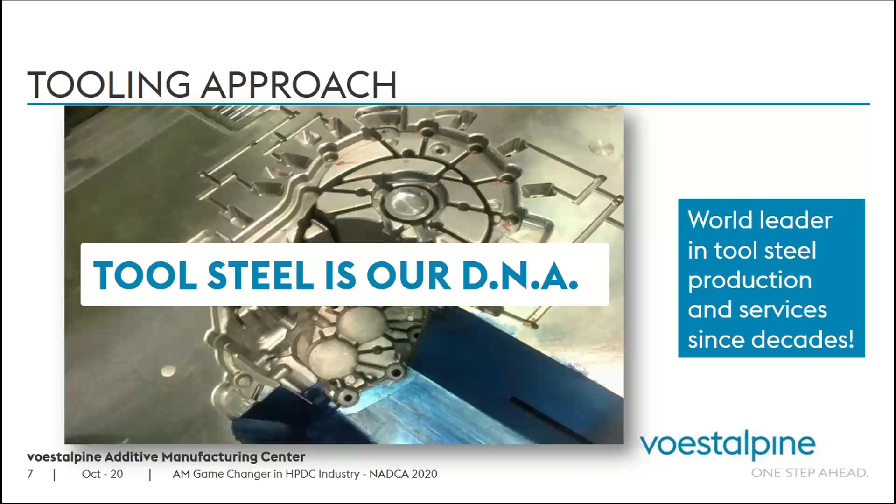I'd like to start with this slide, which is a tooling approach for the voestalpine Group. voestalpine is a world leader in tool steel production and services for decades. Tool steel is actually in our DNA. This is something we have been doing for decades, and this is part of who we are and how we differentiate ourselves in the market.

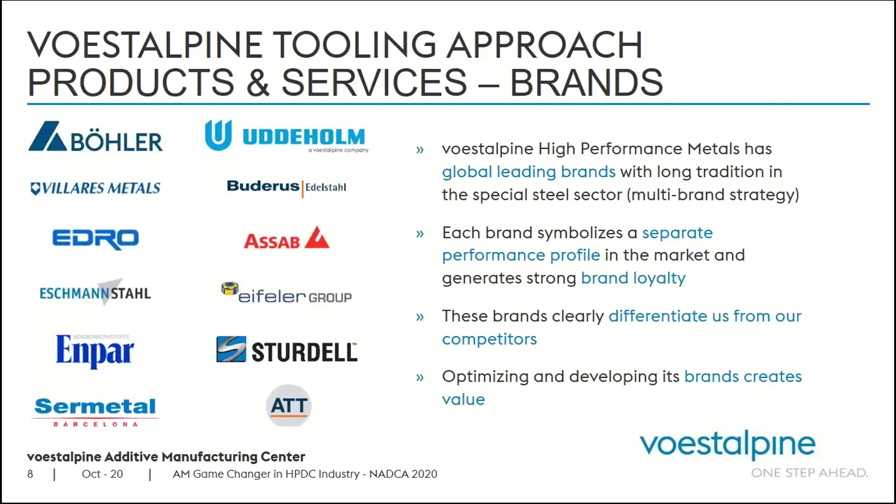So this is a very high level introduction to our group. And if you look at the value added service to our customers, besides the production mills that I presented,

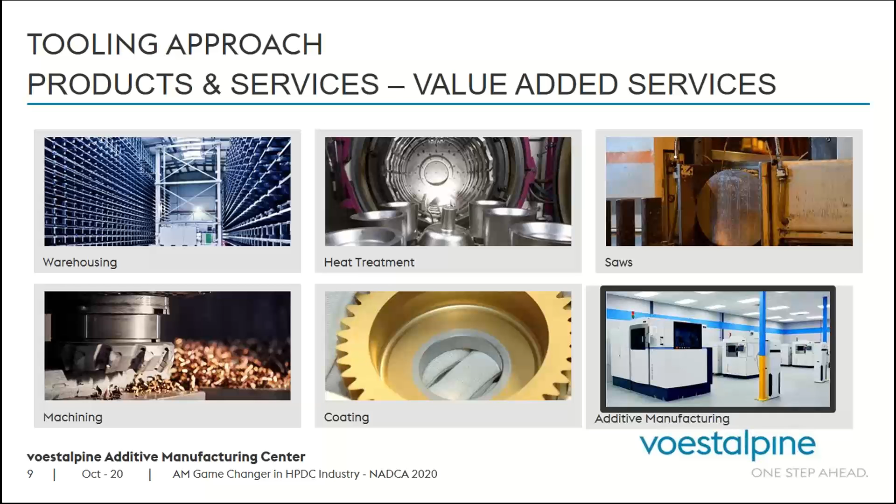we have warehousing in multiple locations, having material ready for our customer. We provide heat treatment, saw cutting as needed, machining as required, like 6-side machining or additional machining if required, coating, the new addition from Eifeler, and last but not least, we added our additive manufacturing capabilities to complement the whole

value added service to our customers. So when you look at the tooling approach, as I mentioned, we discovered that additive manufacturing is the missing link to a full solution provider. And that's why we embarked on this journey of additive manufacturing with our expertise in powder development and powder production and all the engineering support that we have and the post-processing. So AM was a key to be added to our portfolio.

So switch gears now to focus on additive manufacturing, which is the main focus of this webinar. I would like to start with a video, just a couple of minutes. This is from our group, voestalpine, and it shows a focus on one specific technology, powder bed fusion, which is mainly what all the applications I'm going to present in the case studies have used, because with additive manufacturing there are multiple technologies like direct energy deposition, wire arc additive manufacturing, but powder bed fusion is very applicable for die casting because it can provide lots of internal features. So let's watch together this video and then we'll continue our discussion for the webinar.

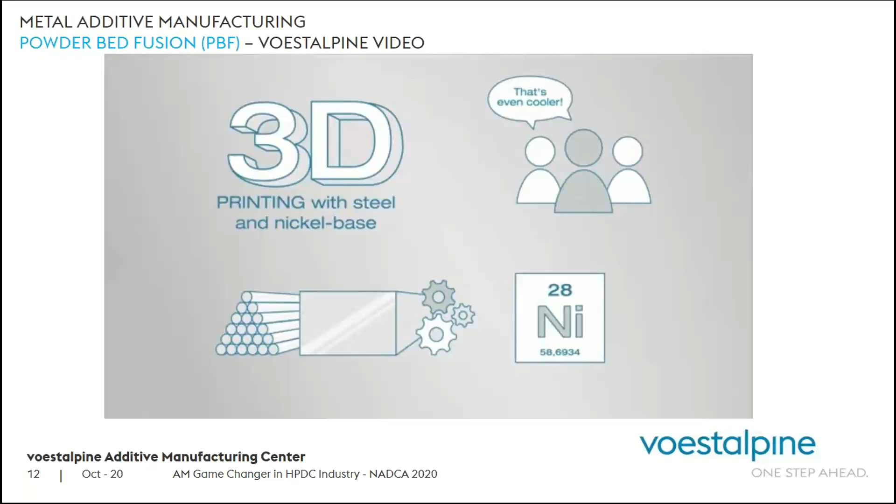You've heard of 3D printing, right? Nowadays we can print lots of different things out of plastic, including toys, fancy sculptures, our own little mini-me. But what about 3D printing using steel, nickel-based alloy, and other metals? Believe it or not, that's possible too. Whether you need parts for an aerospace turbine, a racing car, a medical implant, or a tool, you can print them all using what those in the know call additive manufacturing. By covering the whole value chain from the powder to the finished product, we at voestalpine will be the leading metal powder supplier for additive manufacturing and customized 3D manufactured parts.

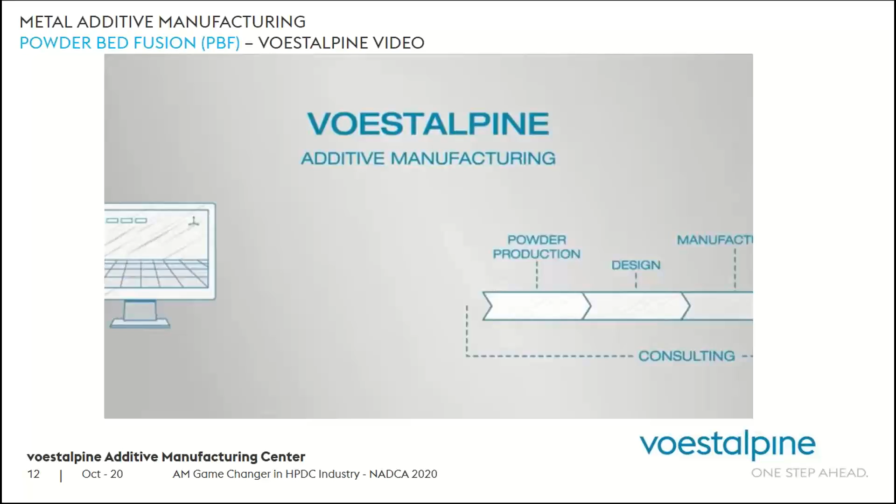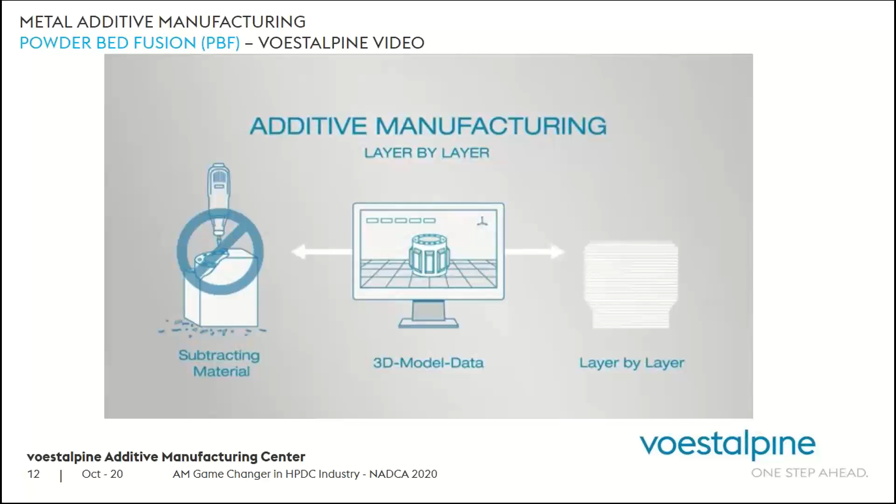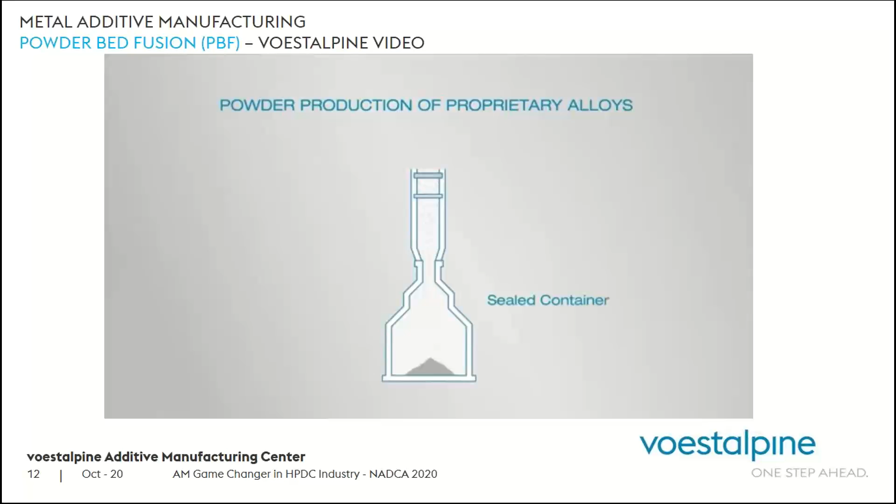Let's take a look at how it works. Objects created using additive manufacturing are built up in layers according to 3D model data. Instead of cutting material away, it is added layer by layer to form almost any shape you need. For this metal processing, we produce high-quality metal powder within our group at Böhler and Uddeholm. This is typically done by vacuum induction melting and inert gas atomization. The powder can be made from metals such as steel, nickel-based alloy, and cobalt chrome. First of all, the melted metal alloys are refined and degassed. This refined melt is then poured into a gas nozzle, where it is disintegrated into metal powder by a high-pressure gas stream. The different powder fractions are then put through a sieve to separate them before they are sealed in containers. Then we can start creating.

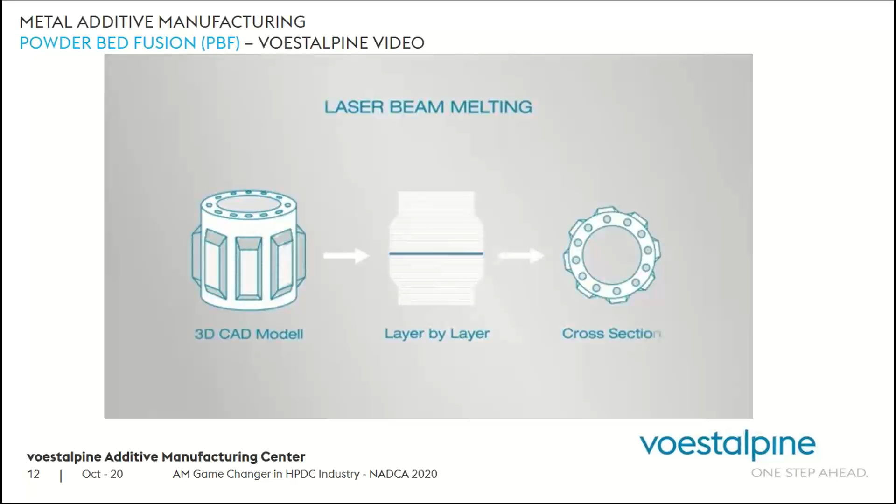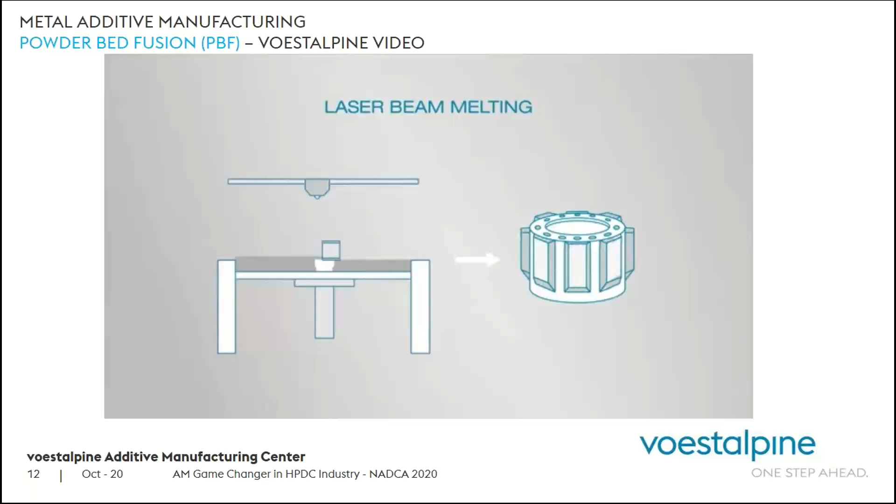At voestalpine, we use the so-called laser beam melting process. The first step is to slice a 3D CAD model of the designed component into cross-sections. This data is transferred to the additive manufacturing system, where a laser melts each section in 20 to 100 micron layers of metal powder from the bottom up until the part or prototype with full density is built. Additive manufacturing opens the door to a world of new possibilities in the production of tools and parts. Thanks to this

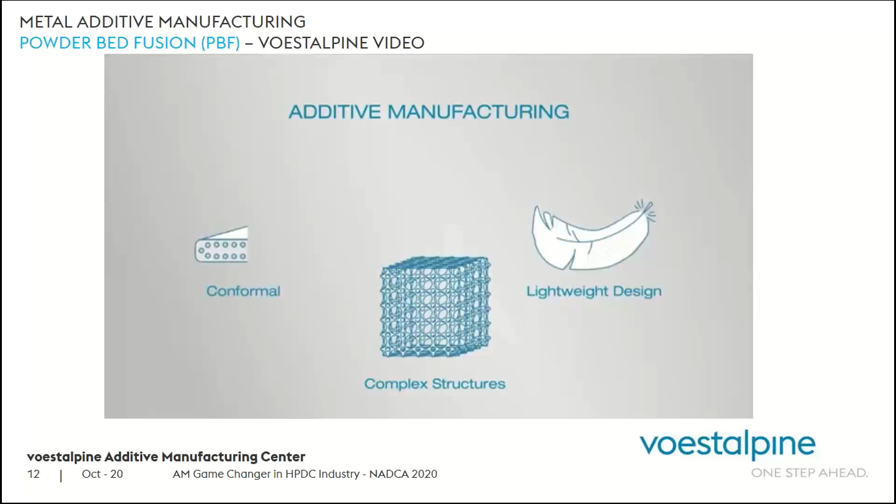state-of-the-art technique, we can now create custom-made parts with complex structures. We can make lightweight designs as well as improve conformal cooling by optimizing formerly inaccessible areas. And the economic advantages are numerous. Faster production, shorter development cycles, lower transport and storage costs, reduced raw material consumption, and the list goes on. Inspirational, isn't it? For more information, please contact us or visit our website at voestalpine.com/additive manufacturing. voestalpine, one step ahead.

So hopefully the last couple of minutes was able to get everybody grounded about the technology and how it works. So this slide that you see, several years ago when you start talking about additive manufacturing, people were concerned about the density that you can get out of building the part by powder.

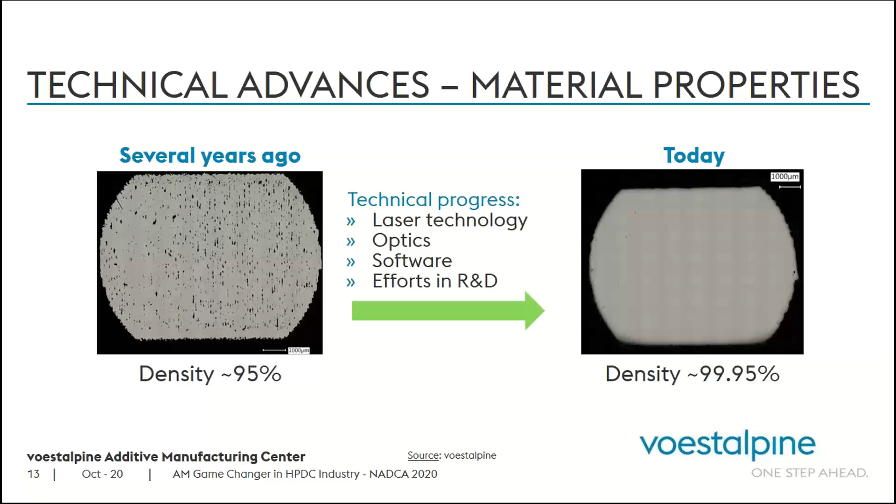So it was around 95%, but over the years, with technical progress in laser technology, optics, software, and efforts in R&D, today you can get the density to 99.95, and if you need additional for any applications that would require maybe fatigue strength, you can just go for hipping as well, and you get it to 99.99. So this is to increase the confidence in the material integrity you get for AM is the same identical like the wrought steel. And this slide actually confirmed the same message. So this was from a voestalpine powder.

If you look at this table on the right-hand side, if you buy wrought steel for DIN 1.2709, its hardness is up to 52 Rockwell, tensile is 2000, yield is 1930, and elongation is 8. If you build it by additive manufacturing, as printed, you get certain hardness and mechanical properties. Going through the recommended heat treatment cycle for this powder, you can get it to 55 Rockwell, almost identical to wrought steel.

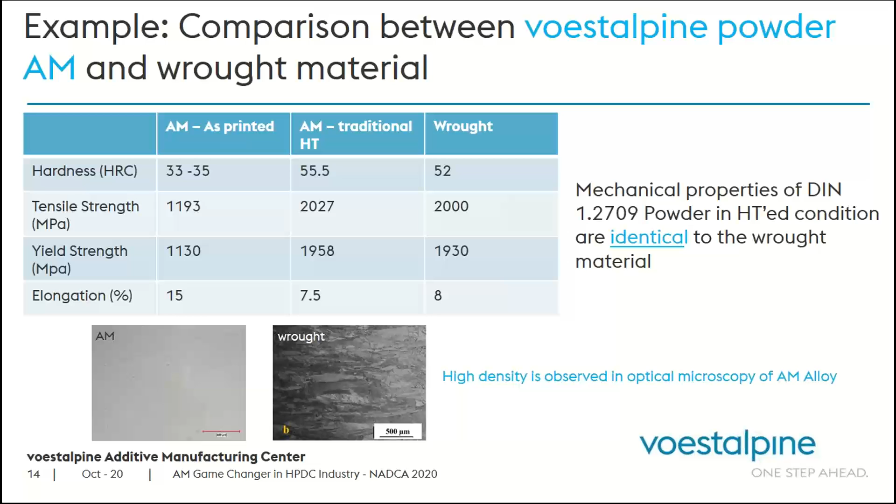Below are two pictures from microscopy showing the density observed. It is very high density for the AM part on the left-hand side compared to the wrought steel. These two slides confirm there is no risk in building high-pressure die casting inserts by additive manufacturing. The main message here is don't try to use additive manufacturing for parts dedicated to other manufacturing technologies.

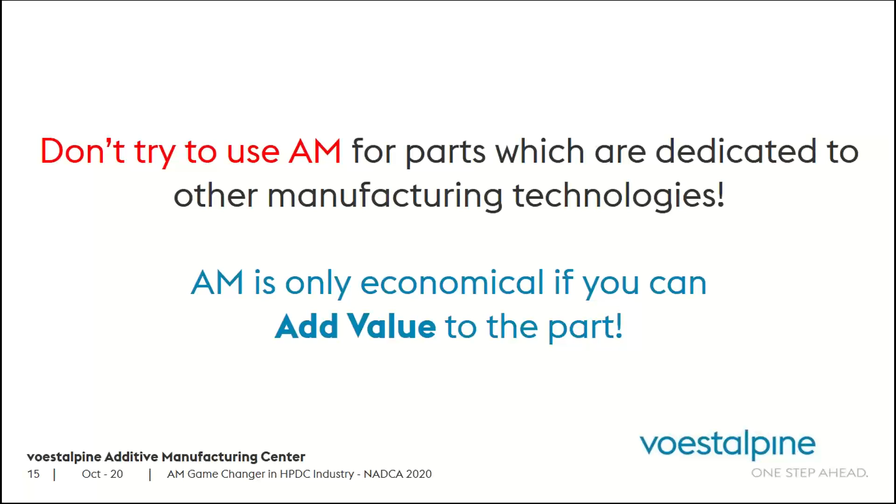Additive manufacturing is only economical if you can add value to the part, and adding value could involve different aspects of the product. The whole idea is you have to design the part specifically for additive manufacturing, and then you can get all the benefits that AM can provide in your industry.

I'm going to switch to some case studies and success stories. Looking at high pressure die casting, what are the common failures? One is soldering, when aluminum or molten metal sticks to the die. Another is heat checking, a combination of thermal cyclic stress, tensile stress, and plastic stress. Another is shrinkage porosity, which occurs during solidification and hot spots in the porosity zone. Another common failure is mold erosion, which is mechanical wear mainly due to the velocity of the melt. These are common failures happening with traditionally built molds.

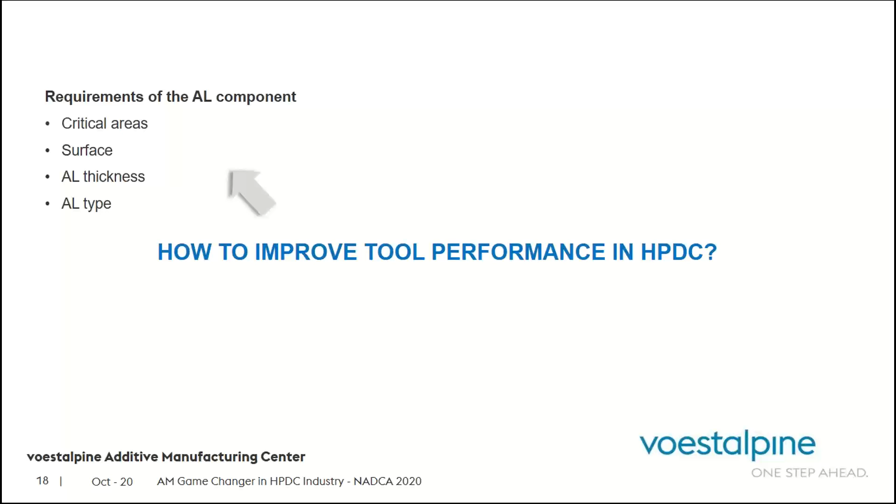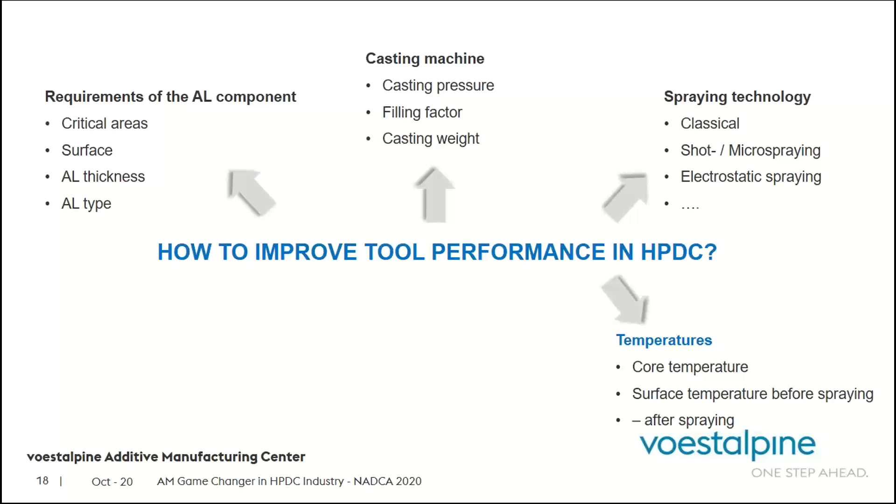So how do we improve tool performance in high pressure die casting? There are multiple aspects to work on. One is the aluminum requirement of the component. Another is the casting machine itself, including casting pressure, filling factor, and casting weight. Another is the spraying technology, micro spraying or classical. Also the temperature, core and surface temperature before and after spraying, the planned cycle time, contact time, casting simulation, and casting speed.

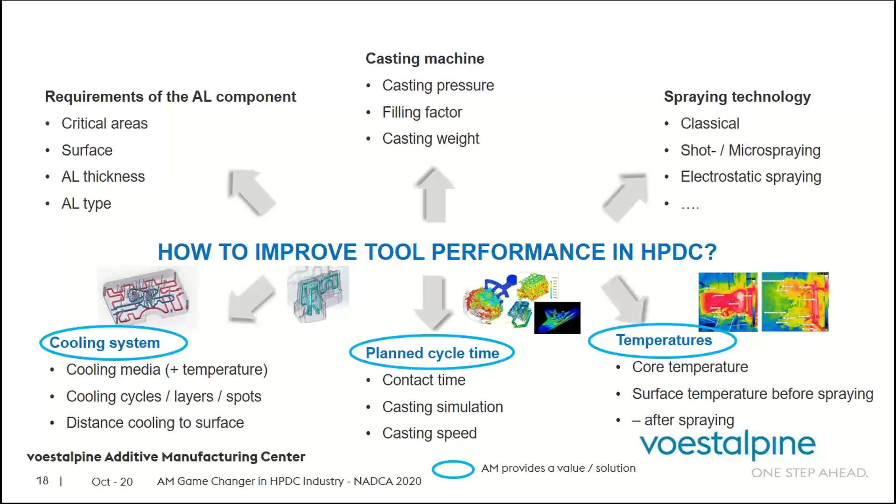Last but not least, the cooling system: the cooling media used, the cooling cycle, and distance of cooling to the surface. If you look at the bottom three categories, these are where additive manufacturing provides value or a solution in improving performance of high pressure die casting: controlling temperature, planned cycle time, and the cooling system as well.

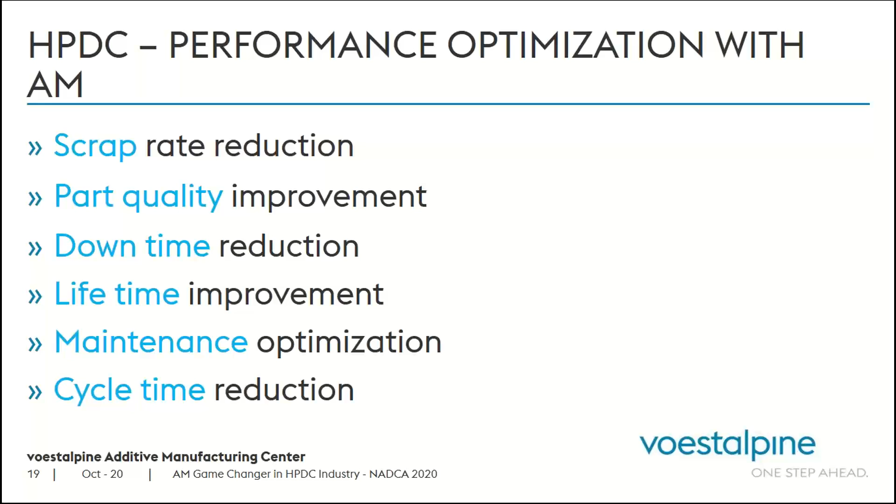For optimization of high pressure die casting by additive manufacturing, it adds value through reduction of scrap rate, which is commonly very costly for die casters. Part quality improvement is another value added by using additive manufacturing, along with downtime reduction, lifetime improvement, maintenance optimization, and cycle time reduction. Categories of parts that could be improved by additive manufacturing include heat attacked sliders, sub-inserts, and the distributor or ring.

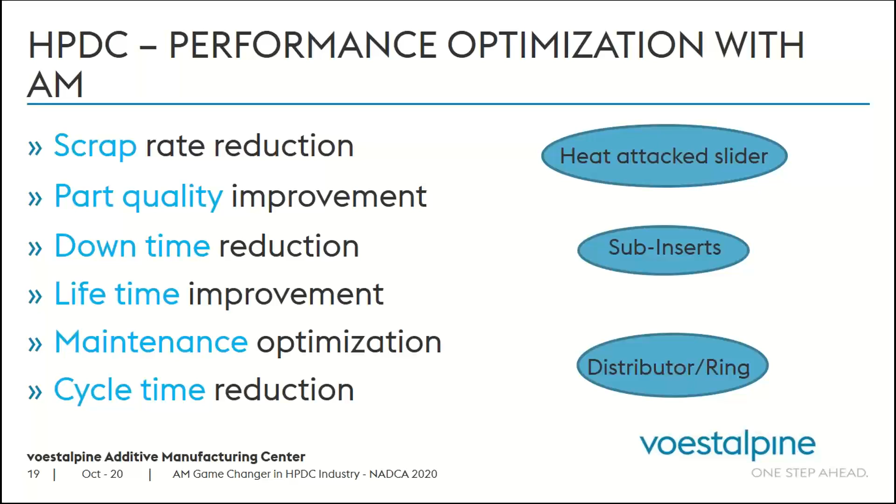These are some of the benefits you can reap by applying additive manufacturing correctly and redesigning inserts for AM. Don't just take the conventional design and build it by AM. The most benefit comes from having a design engineer and a simulation engineer working hand in hand to redesign the insert—minimizing scrap rate, increasing part quality, reducing downtime, improving lifetime, and optimizing maintenance and cycle time reduction.

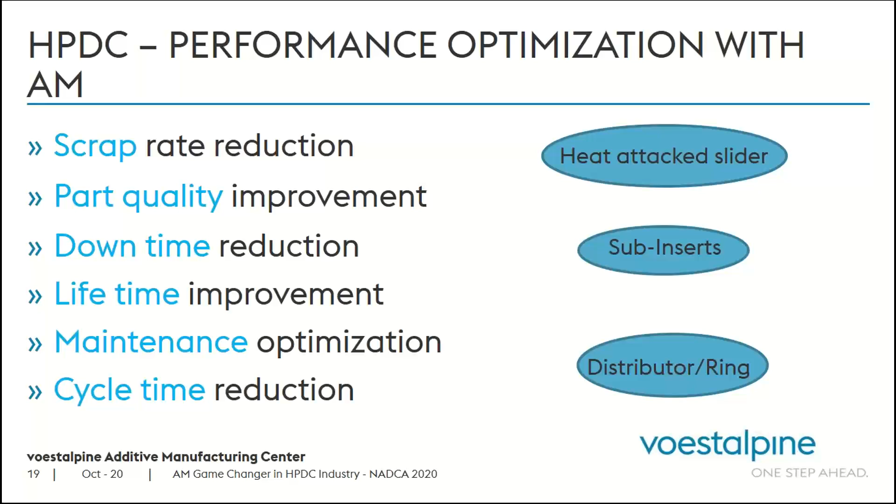I'll show you a couple of case studies from our group. For the distributor you see in front of us, we used powder from voestalpine, and the reason for applying additive manufacturing was targeting cycle time reduction and lifetime improvement. As you can see, the internal cooling channels are quite complex. After 120,000 shots of this specific application, we achieved a cycle time reduction of 2.5 seconds and a lifetime improvement of over 200%.

In this case, the original cycle time was 53 seconds and we were able to drop it to 50.5 seconds—2.5 seconds per shot saved on this distributor. From our group, we provided the powder, did the design, simulation, the building, and the heat treatment as well.

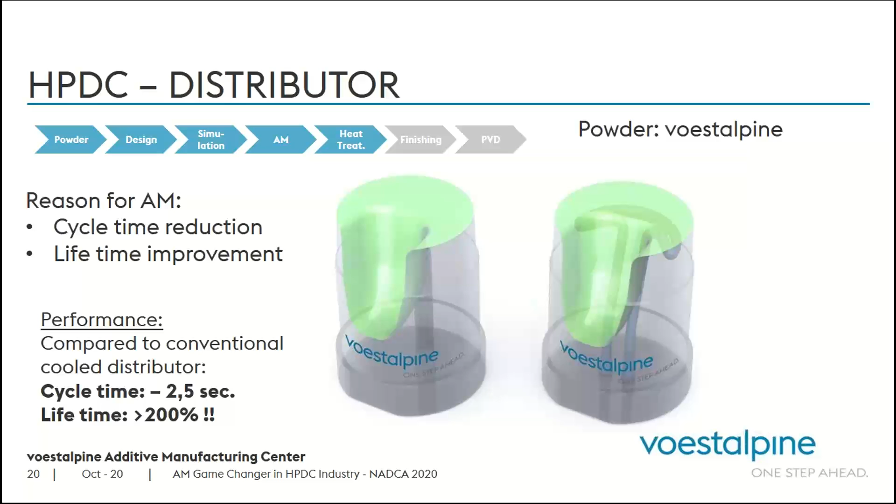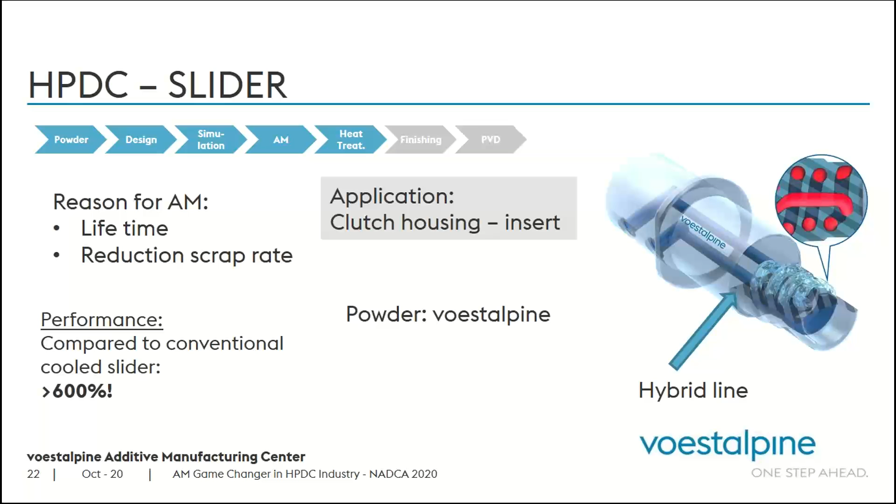600% improvement. So in this case, from 8,000 parts that you were able to get from conventional design, we are able to get 50,000 parts. That's an unbelievable improvement that you can get by additive manufacturing, from 8,000 parts to 50,000 parts - an unbelievable achievement redesigning the part inserts by additive manufacturing.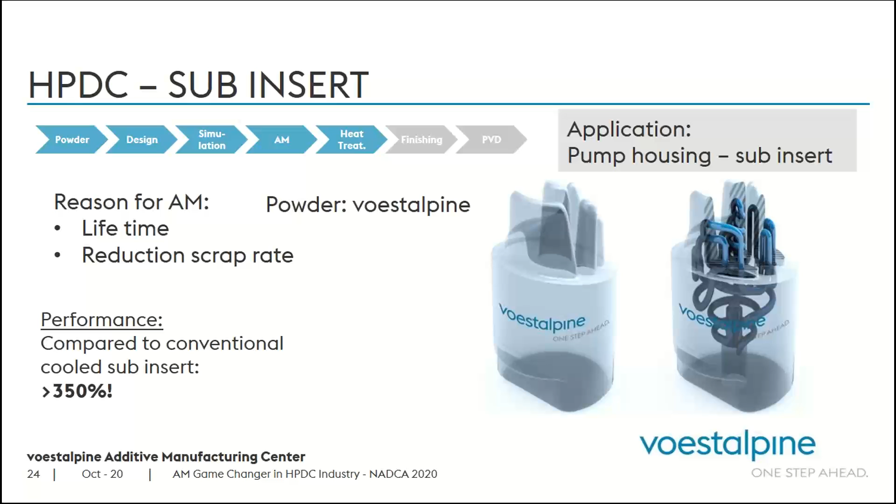Compared to a conventional cooled sub-insert, 350% improvement. So conventionally, they were able to get 7,000 parts. By applying additive manufacturing and the right design, getting the cooling where it's needed with no restriction - there's some guideline for the design, but you can say if you can design it, you can print it - from 7,000 parts, we were able by AM to get it to 25,000 parts. That's a really improvement in the lifetime of the insert.

Another example, as you can see here, this was for a major OEM car manufacturer, with extremely high temperature reduction. If you look at the soldering problem again here on the tip, it was over 370 degrees Celsius at the tip conventionally. This was for a differential housing. By applying additive manufacturing, the scrap rate was reduced from 20% to 6%, which is a huge, huge improvement in scrap rate reduction.

And we applied the hybrid build approach that I explained before to minimize the cost for the customers, so they increase their profitability as well. And this 370 degrees Celsius soldering problem, by additive manufacturing design, we're able to lower the temperature to 280 degrees Celsius with no soldering problem at all. So this is a huge, huge improvement.

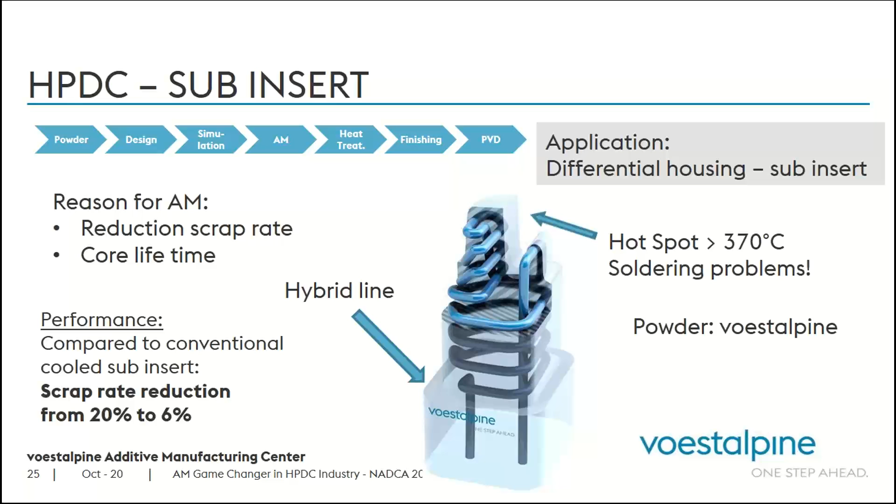This is just to show you that this is not just a prototyping technology, but now it could be in serial production. And it's working and has been proven with multiple customers to us. So this was just to highlight a couple of success stories and to increase your confidence that inserts are already running in actual production environments with huge success, huge acceptance for additive manufacturing in high pressure die casting.

I will switch gear right now about voestalpine and what we can offer to our customers, and what is our approach for additive manufacturing, adding value to our customer.

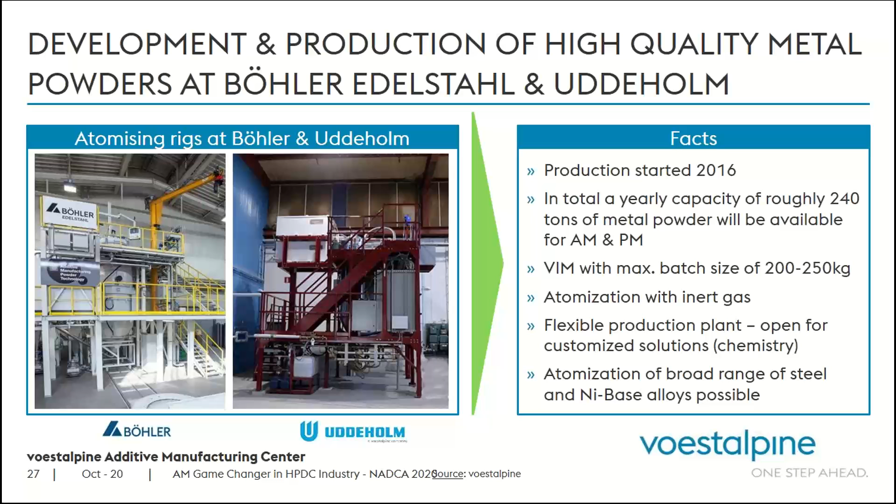The snapshots that you see on this slide show multiple mills where we can produce the powder used in additive manufacturing. We have capabilities of approximately 240 metric tons every year for multiple grades, for multiple mills that we produce powder, like Uddeholm.

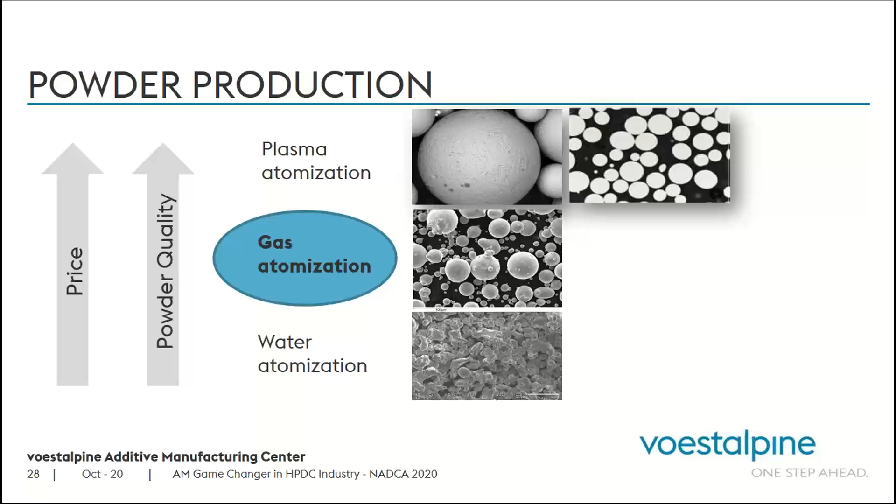What we are using for additive manufacturing, for the time being, and for high pressure die casting is the gas atomization process, which is very convenient and optimized for this type of application. Plasma has its own niche, like for aerospace and for specific grades like titanium. But gas atomization is the most common production method for powder, commonly accepted and used in this industry.

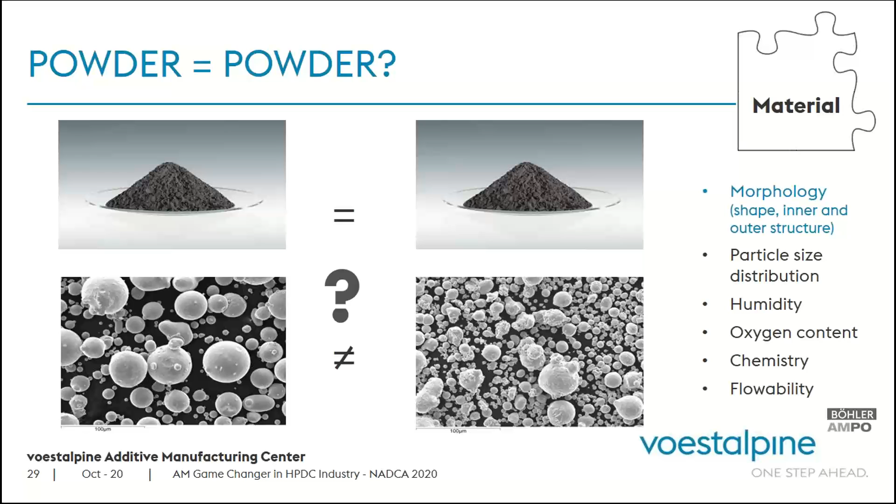If you look at the powder, anybody looking at two batches of powder would think they look the same. However, when you go deeper, it's completely different. There are lots of aspects that affect powder quality: the morphology, the shape, the inner and outer structure, particle size distribution, the humidity in the powder, oxygen content, chemistry, and flowability. That's why we put a lot of focus on the quality of the powder we are producing and delivering to our customers, or using within our additive manufacturing centers internally.

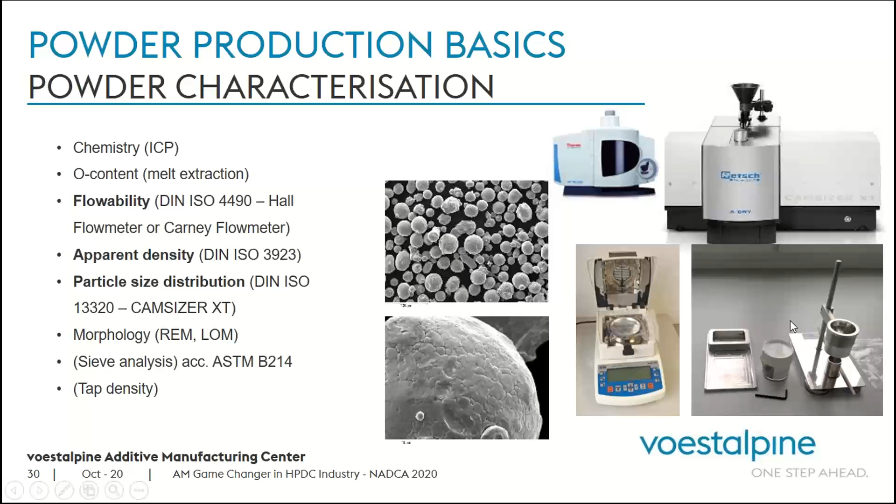So if you look at this, there's multiple testing that has to be done at the mill. Like you have the CAMSIZER, as you can see here on the top right, for particle size distribution and checking the flowability, and everything is done according to the standards.

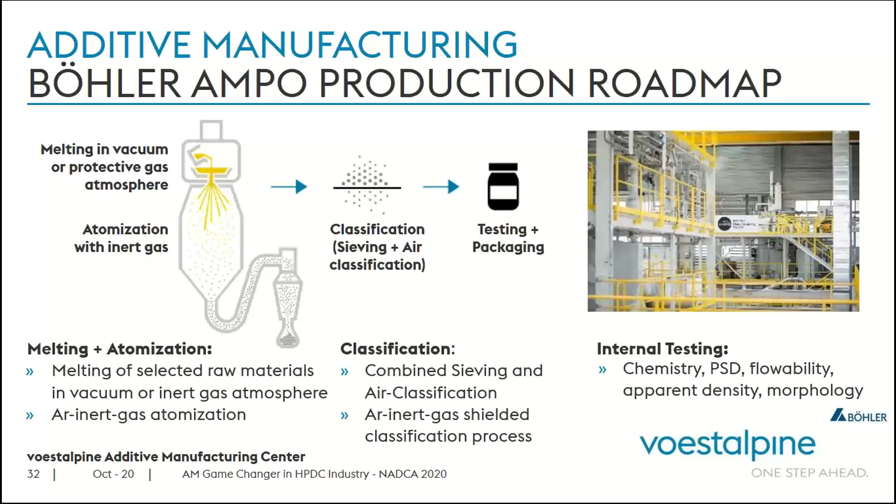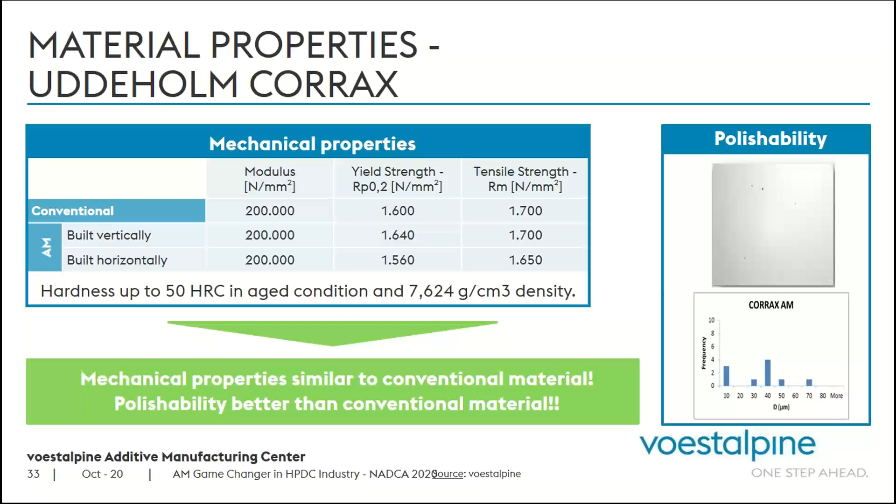And that's what we are doing in multiple industries as well, producing specific powder for specific applications. To give you an example, this is another grade that we are using for high pressure die casting. If you compare it to H11 or H13, there has been a project with OGI lab in Austria, with voestalpine, doing multiple testing. In this case, there were over 800 specimens tested.

As you can see here, it's being inserted in molten aluminum and then being cooled back and forth, repeatedly. And in summary, looking at the grades that have been produced, adding value, there's better performance on the heat checking resistance compared to the traditional H11 and H13. This was done by additive manufacturing.

We are literally trying to have breakthrough technologies and specific powders that add value to our customers. If you look at the right-hand side, going through the same thermal cycling, the cracking is just completely improved. As you know, heat checking resistance is the resistance to the combination of thermal cyclic stress, tensile stress, and plastic stress. So if this was the standard performance, the red line, it went far beyond, which is much better.

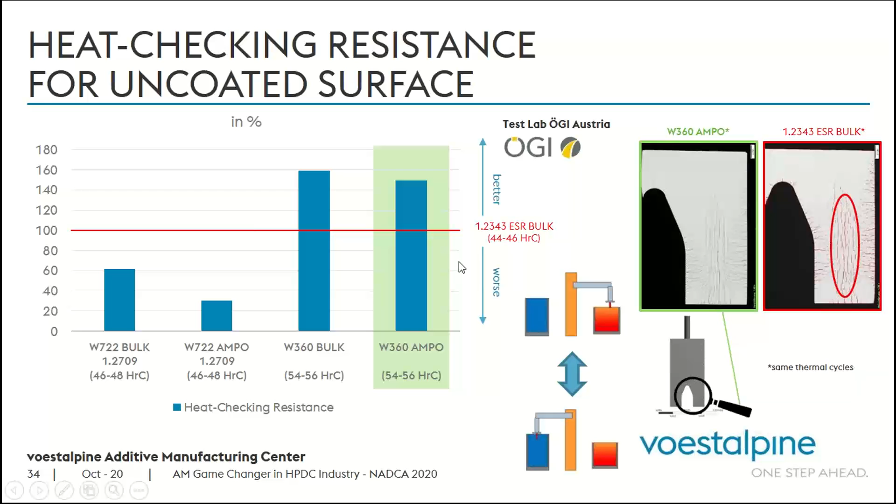So the message regarding the powder: we have the standard voestalpine material, which has its niche application, and you have been using it for quite some time, very successful, well accepted in the market, providing value for our customers - like for not bearing mechanical load, low velocity region, room for conformal cooling, or low tool temp at end of dwell. At the same time, we have a premium material solving specific problems that you're not able to get with traditional material. For example, significant mechanical load, or a thin weight saver where there's no room to add conformal cooling, or a high velocity region.

And what falls in between, we have a very strong engineering team that needs to determine what is the right material to use by going through simulation and identifying what is the potential, what is the value. We need information from our customer on the casting process and the insert geometry to decide. But what I'm trying to send as a message here: we can get it all. Whatever the type of powder needed, we can provide it, along with the design and the value to our customer.

So this is the message here: you should get the cooling where you need it, not where you can drill it, not restricted by the design or where you can drill and plug it. As an example, on the left-hand side insert here, you cannot just keep drilling because of this notch. However, with conformal cooling, you can go around it and get it to the tip. So this is the message of AM - that you can get the cooling where it's needed.

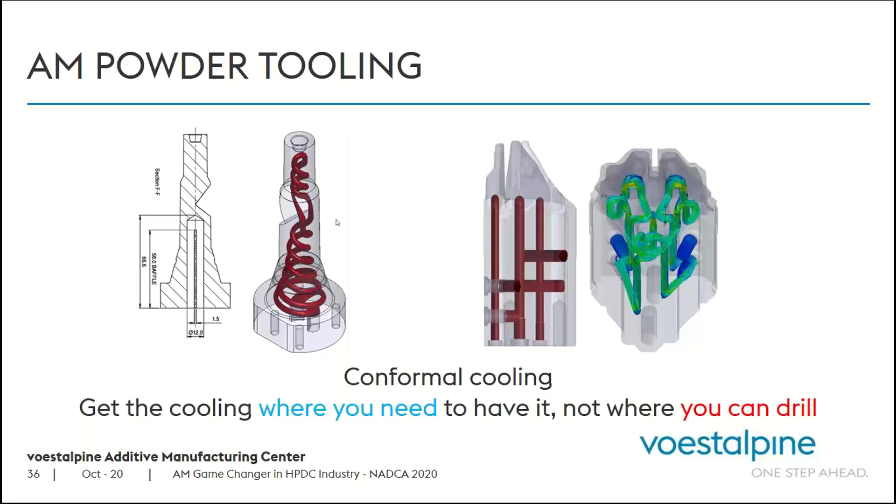So this is the hybrid approach that I explained before in a couple of the case studies. As I mentioned, the motivation of using it here is reduction of AM volume to the functional areas that really require it, and reduction of the manufacturing cost as well, which benefits our customer, trying to minimize the cost per insert.

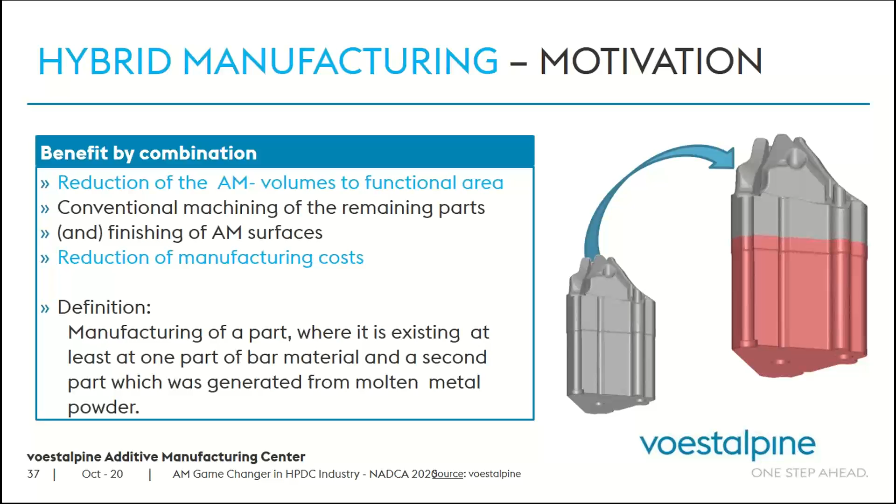Switching gears right now to give you a snapshot about our additive manufacturing global network and footprint. We have 2 locations where we produce the powder - Uddeholm in Sweden and Böhler in Austria. We have multiple additive manufacturing centers. The first one was in Düsseldorf, Germany. Now we have 2 locations in China, in Shanghai and Dongguan. We have 1 in Taiwan, 1 in Singapore, and in North America we have 1 in Toronto, Canada, and the other one in Houston, USA.

All these facilities are ISO certified, and the location in Toronto, Canada is AS 9100 certified, which is mainly for aerospace. So we are qualified to deliver inserts for aerospace, which we are currently doing.

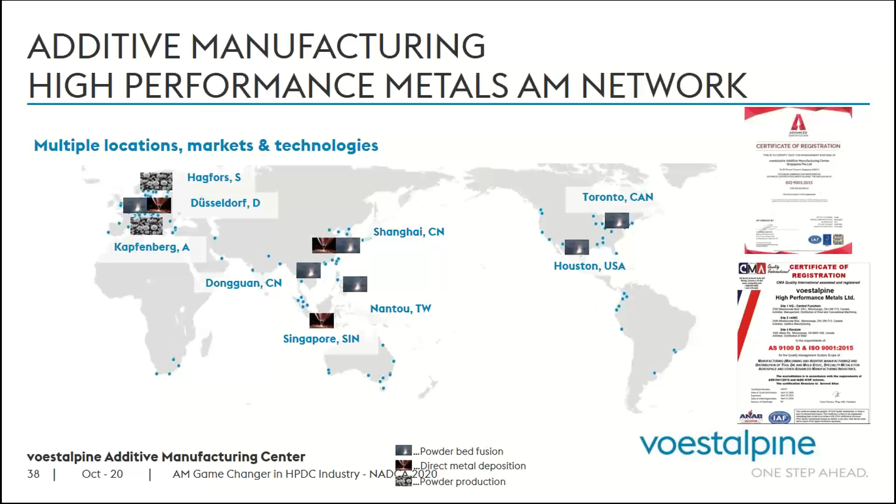The additive manufacturing technologies within our group are split into 3 major categories, and we keep adding new technologies every now and then. We have powder bed fusion, which we explained in the video, and a couple of the case studies have been built using this technology. Then we have direct metal deposition, which uses metal powder, and we have WAAM - wire arc additive manufacturing - within our group.

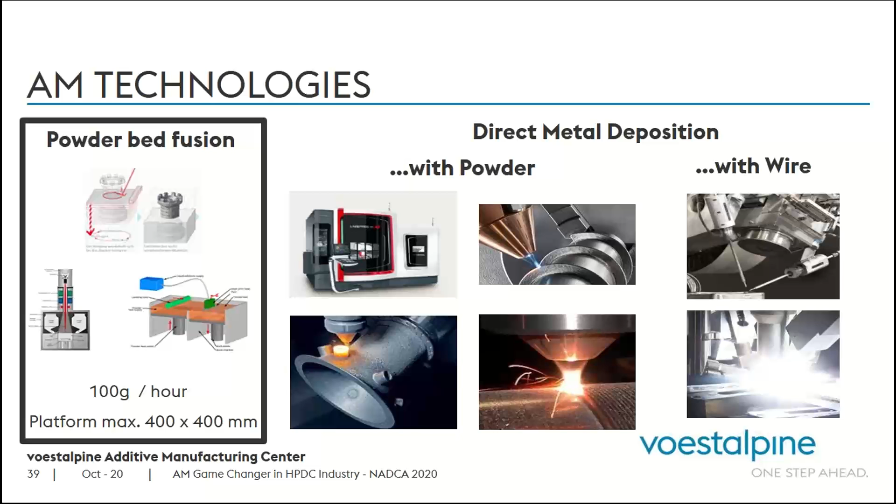Having multiple technologies, we are able to provide a solution, not restricted to one type of technology. These are snapshots of the machines that we have within our group, between laser beam melting and direct metal deposition, and multiple materials that we are producing within our group.

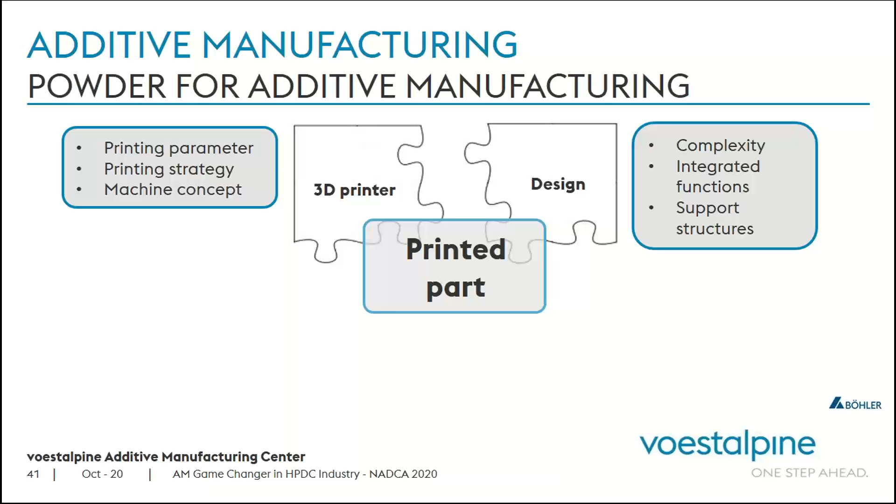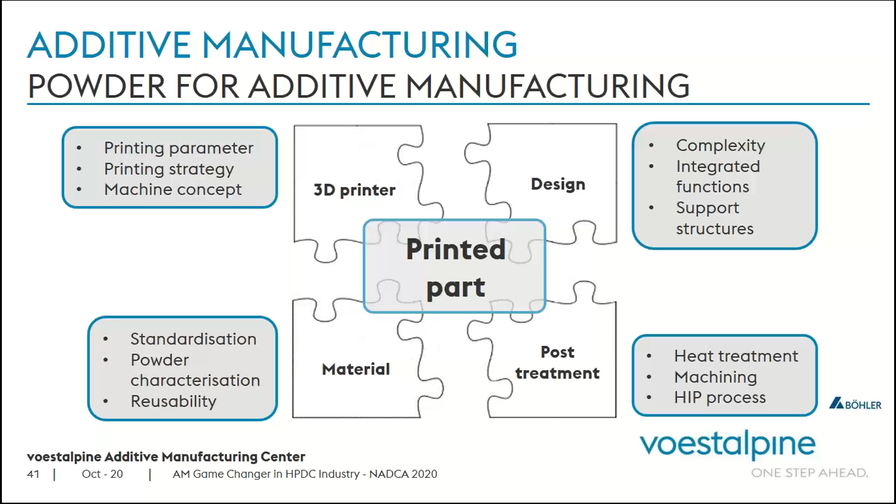So switching gears a little bit about the quality of the printed part - it's a combination of multiple things. It starts with the design. You have to design the part for additive manufacturing to get the best benefit out of it. Then you look at what type of technology for printing, what is the printing parameter, printing strategy, machine concept, and then what is the post-treatment, what type of heat treatment, and what type of post-processing is required. All this affects the quality of the part you are building by additive manufacturing. And last but not least, definitely the material you are using - the powder and the quality of the powder.

So for voestalpine, we are literally providing a solution along the whole value chain for powders and parts.

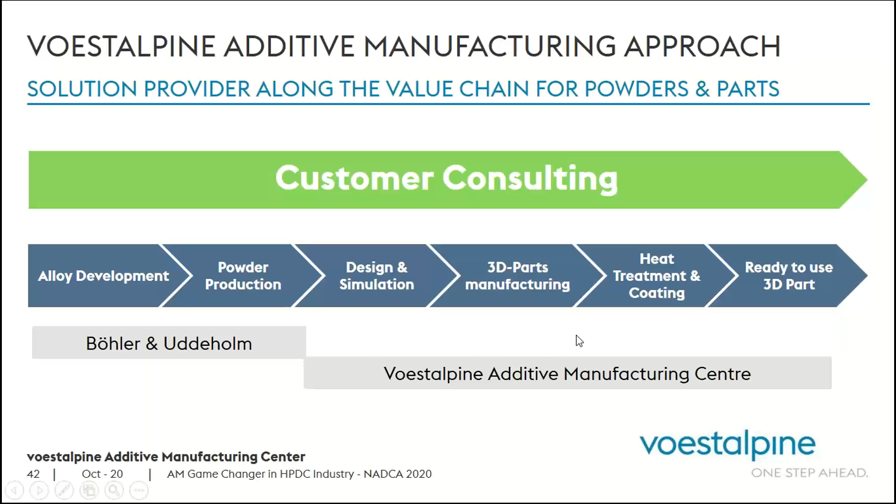So we have a location where we do the alloy development, and as I showed you before, we are developing alloys and producing as well. So we develop and we have production capabilities at our mills. And then we go through the design and simulation, 3D building the part, heat treatment, and ready-to-use part at the end through our voestalpine additive manufacturing centers.

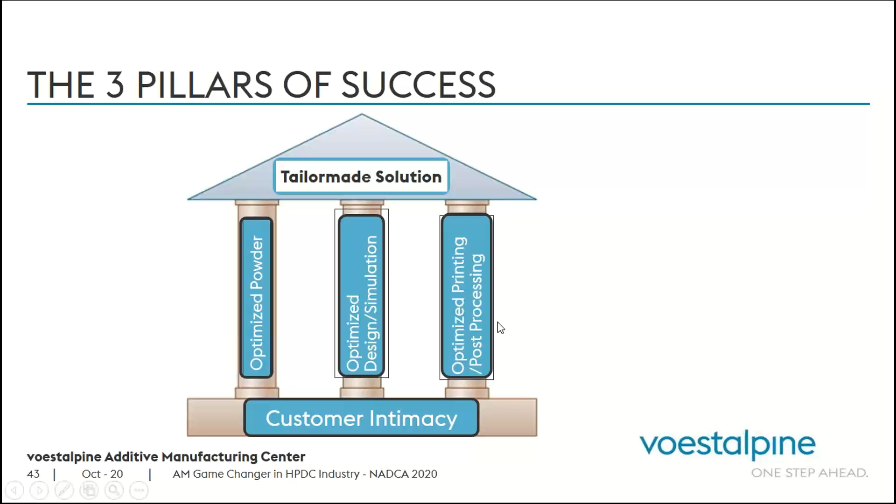So the 3 pillars of success: first of all, we build on customer intimacy for sure, this is our foundation. And then we have optimized powder, as I showed you, optimized for die casting or injection molding or whatever type of industry we are serving. Optimized design and simulation, and optimized printing and post-processing, with the target to provide a tailor-made solution to our customer. This is where we are building our success to provide value to our customers.

So we literally offer end-to-end additive manufacturing services. We do the design, simulation, manufacturing of the parts. We invest in the latest technologies of AM, and we provide our customer multiple full portfolio of services from metal powder. We can provide design and engineering consultation, prototyping and production, or complete additive manufacturing solution.

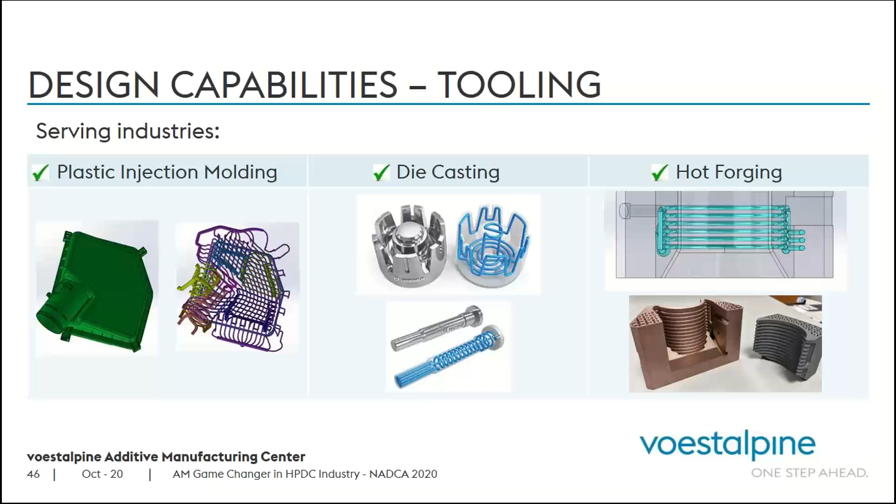As you can see here, we have multiple design capabilities for tooling, like plastic injection molding, die casting, hot forging. As well, we can serve multiple industries in terms of oil and gas, aerospace, and general components, and we leverage the learning from each industry to focus on adding additional value in the design for other industries as well.

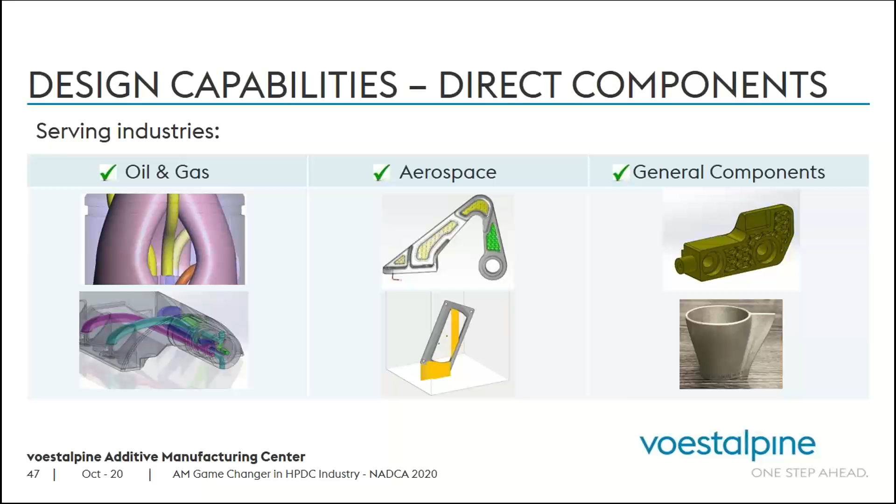We have a complete suite of simulation and modeling capabilities, from structural and thermal finite element analysis, including the standard structure simulation and the fatigue or tool component life. We have flow and thermal computerized fluid dynamics. We do the basic computerized fluid dynamics and comprehensive as well as needed.

And we have end user process in high pressure die casting. We have MagmaSoft, where our engineers work very closely on design and simulation, multiple iterations, to understand and quantify the benefits on the aluminum part itself. And the same in plastic injection molding - for example, how you can improve the warpage, or the quality, or improve cycle time.

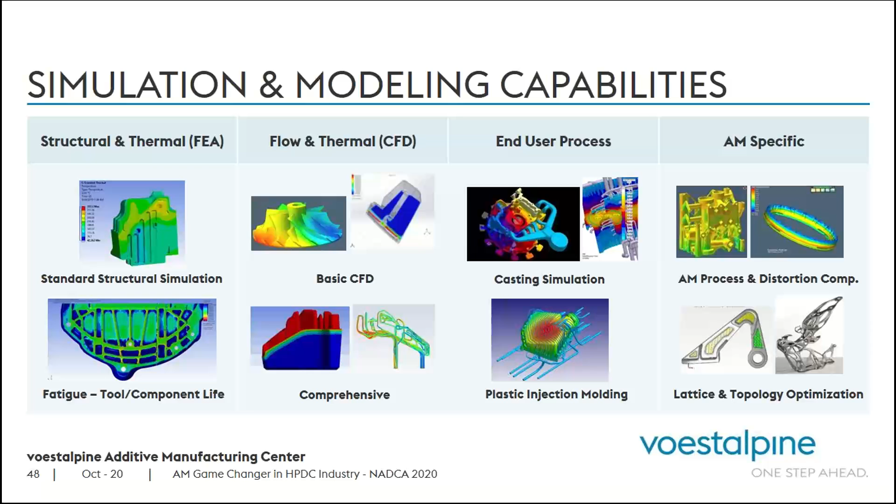So we have this simulation software which we can work with our customers to show them the benefits even before building the part, and additive manufacturing specific simulation software to anticipate if there is any distortion, to optimize the support structure, and to develop, for example, a lattice or topology optimization for lighter weight and saving on building time as well.

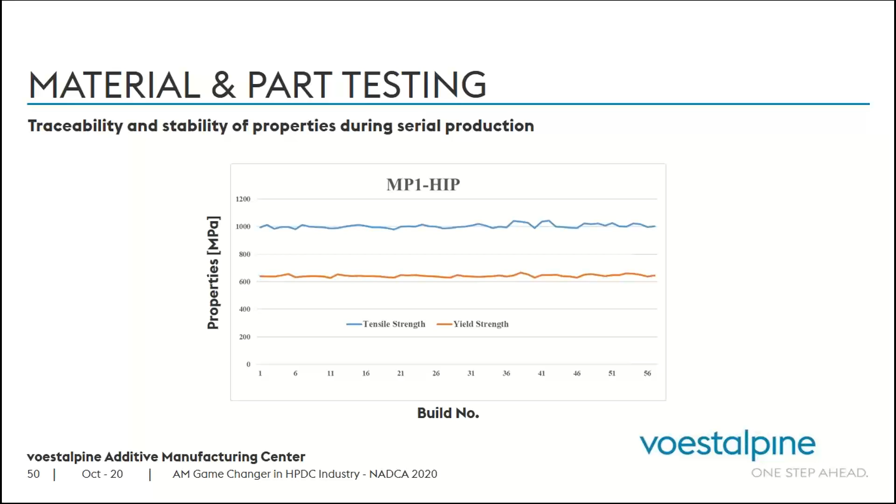And this is one of our unique selling propositions - the quality of the product that we are delivering is consistent over the number of builds, the number of years we have been producing serial production.

We do the incoming powder characterization at the Additive Manufacturing Center for the chemical composition and powder size distribution. We as well do the powder morphology and powder flow measurements. And whenever we have a validation of a new powder or material at the Additive Manufacturing Center, we do the basic properties of different conditions: as printed, heat treated, and if HIP is required as well.

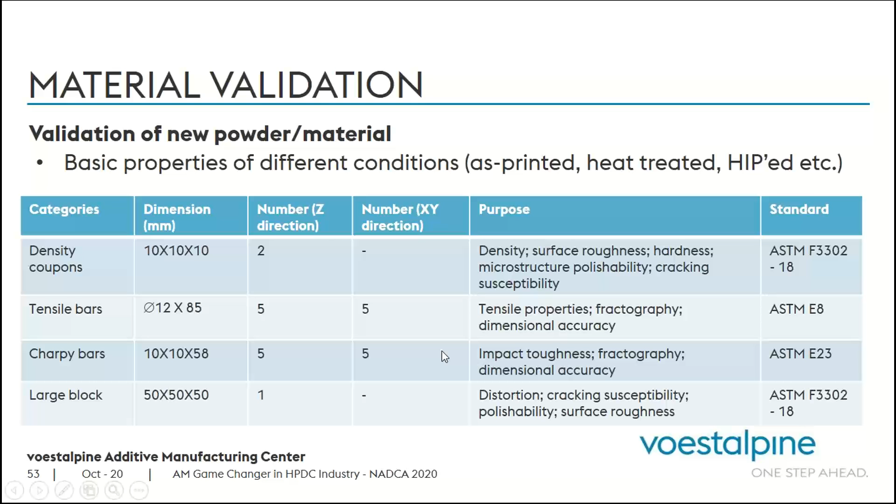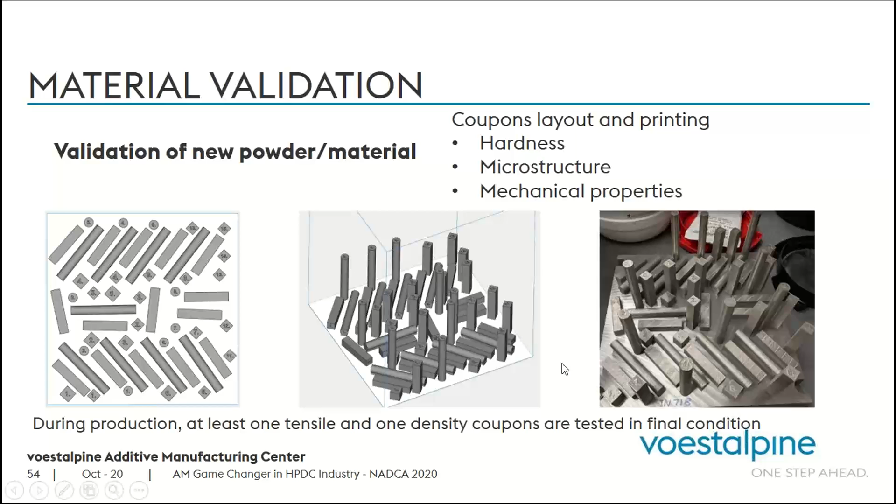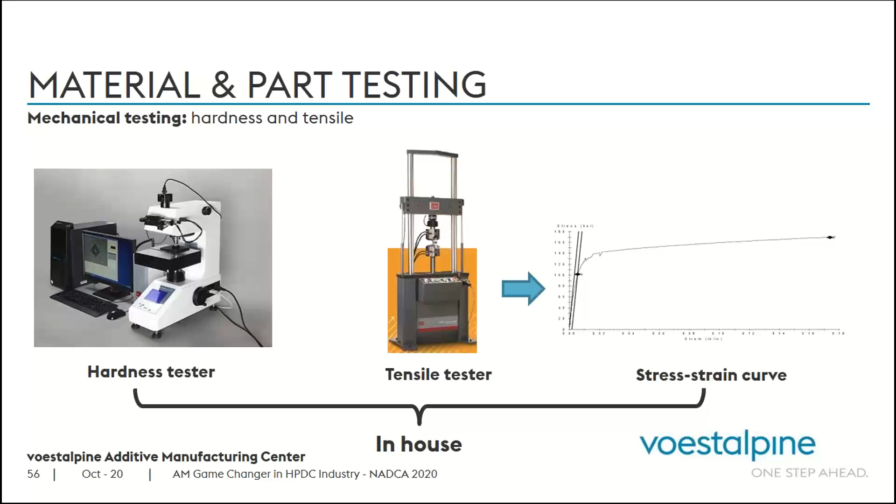And we do the optical microscope and SEM machine as required for scanning electron microscope work. And we do the hardness testing and tensile testing as well in-house to make sure with every build we are building, we can do testing to validate that the mechanical properties have been met before shipping any part externally.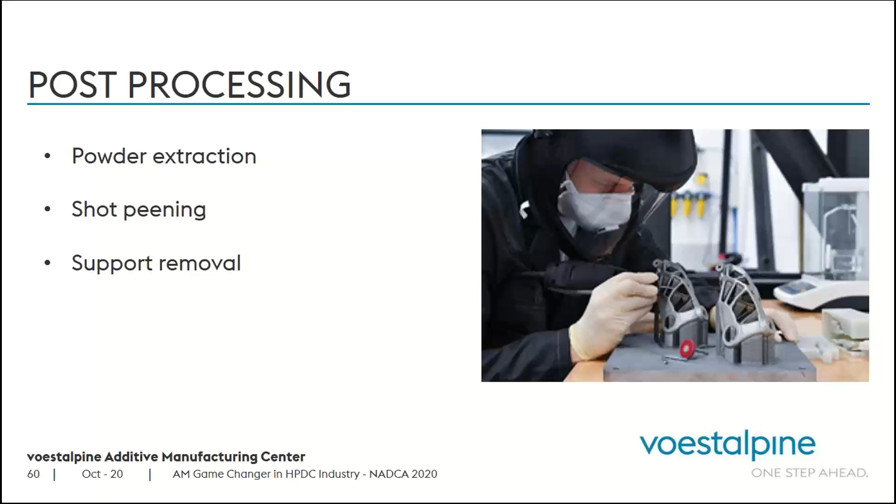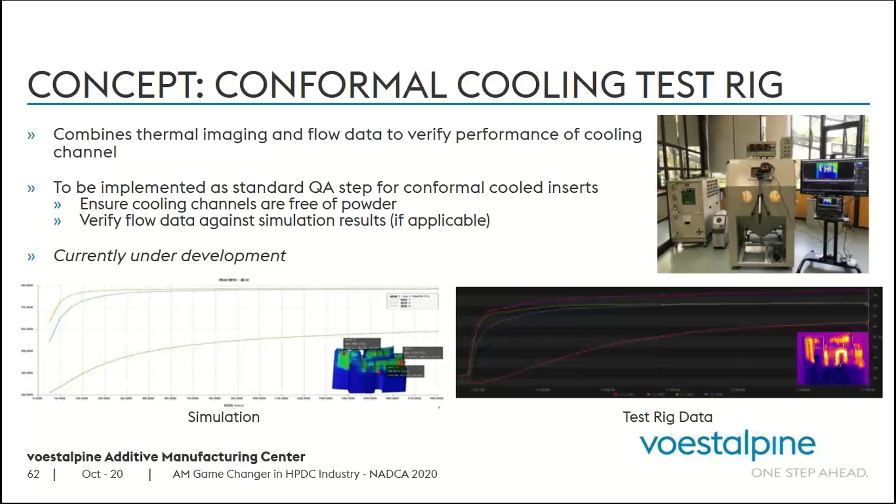When required, we do a conformal cooling test rig to ensure cooling channels are free of powder, and to verify the flow data against the simulation results as well. This we have on a CMM.

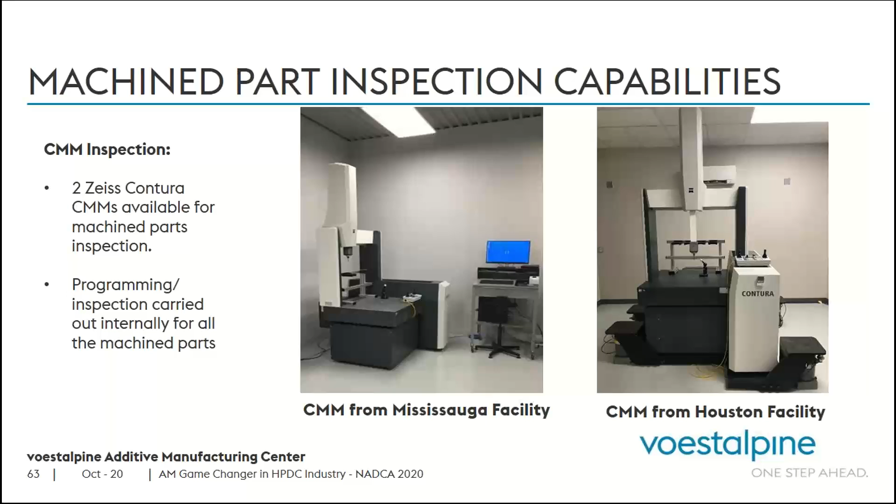A coordinate measuring machine. In case we are finishing the complete machining, the customer can do the finished machining, or we can do it. If we do it, we have to provide a CMM report confirming the final dimensions have been met. Through the value-added service, we have a mill turn machine to complete the finished machining.

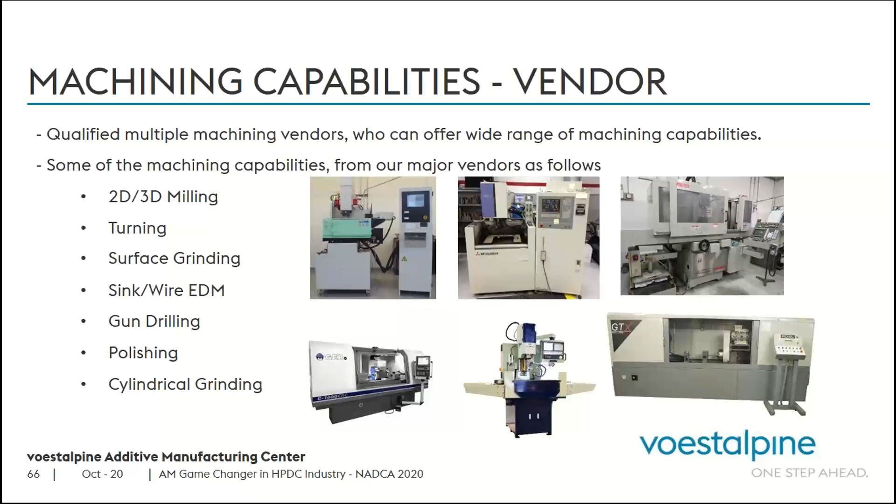Within our supply chain, we have multiple equipment through our suppliers that can provide the required finishing operations, whether it's turning, surface grinding, sink or wire EDM, gun drilling, polishing, or cylindrical grinding as well.

Within our group, we have the Voestalpine Eifeler group that I introduced at the beginning, mainly designed to improve performance and tool life, all under one roof. So we take full responsibility of the whole one-stop shop.

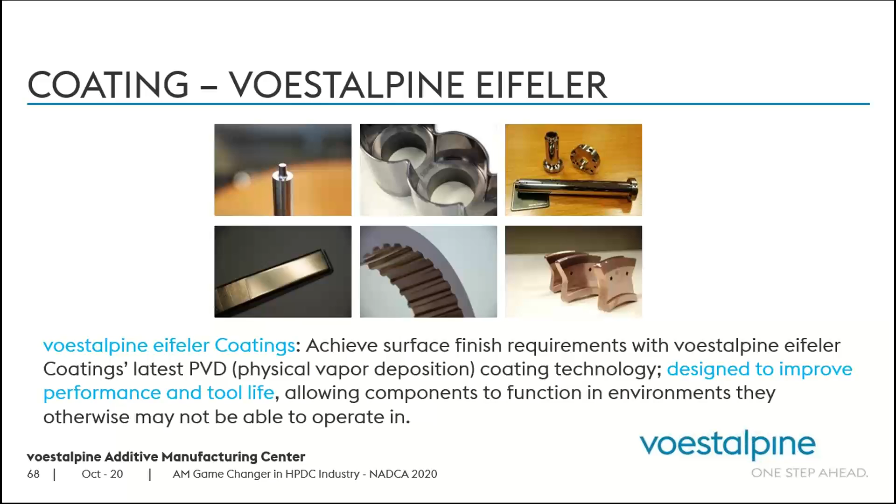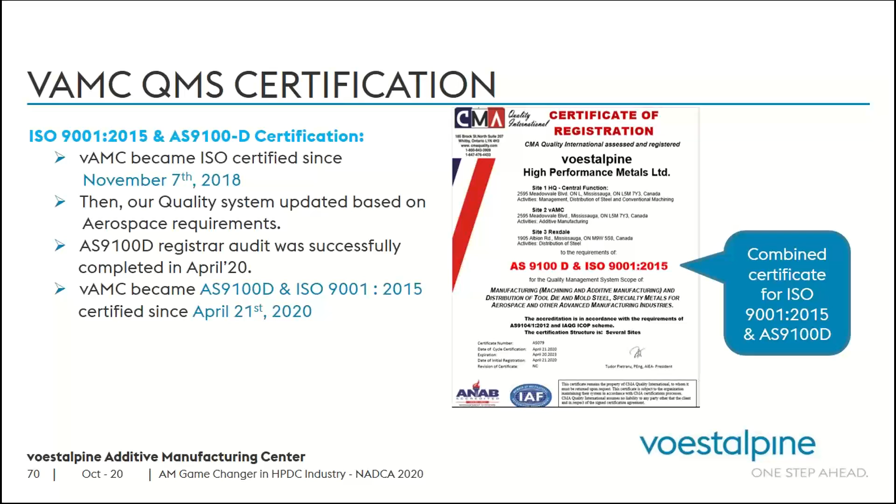With our quality systems, as I mentioned before, we have AS9100 and ISO 9001. This ensures high quality standards of delivered components to our customers. Our quality system is categorized into 4 categories: order processing, vendor management, process control, and quality inspection of receiving powder, in-process, and final inspection before delivering to our customer. So it's a very rigid quality system that we have within our group.

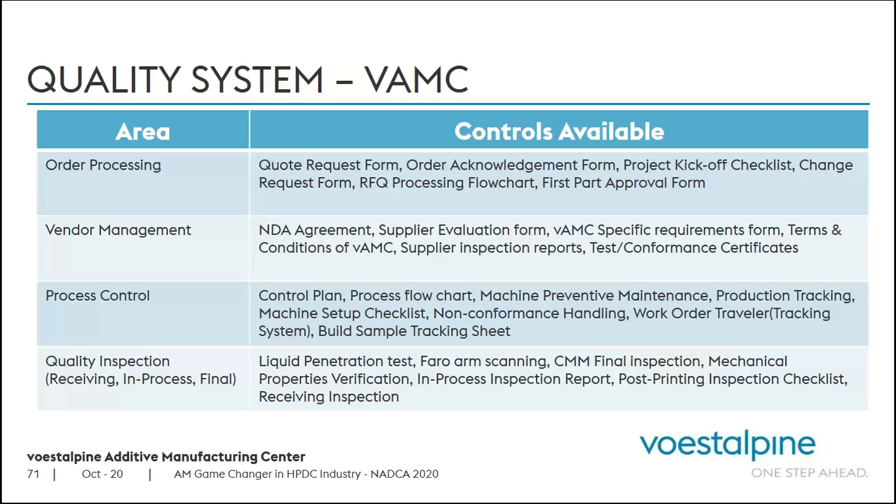This message I want to highlight: there are some challenges with the additive manufacturing process. You can hear about porosity, cracking, oxidation, residual stresses, rough surface finish, or dimensional deviation - some of the challenges.

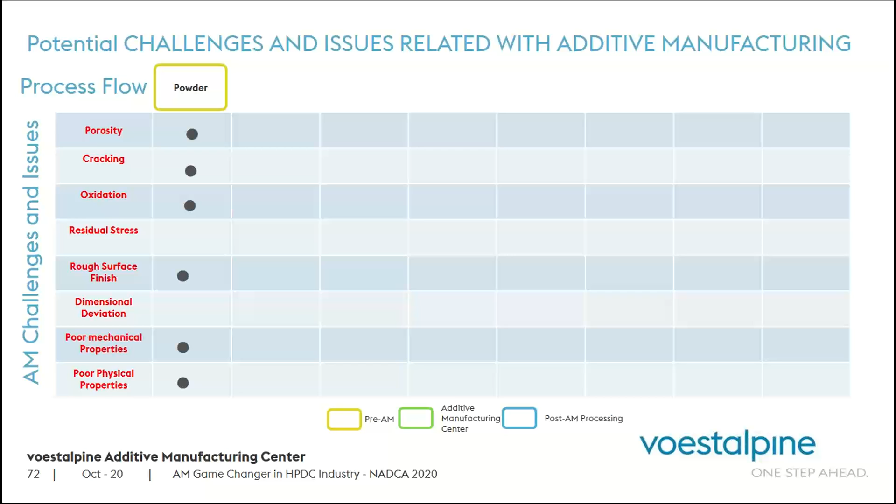If you look at the value chain from the powder, parameter development, design, simulation, building the part, post-processing, heat treatment, and final machining - if you get a cracking in the part at the end after delivering it, where is it coming from? If you don't know, it could be from the powder, it could be from bad design.

Or it could be not optimized building parameters - something went wrong during the build, not controlling the oxygen content as an example. Post-processing, maybe the heat treatment was wrong. So it's very hard to trace it back.

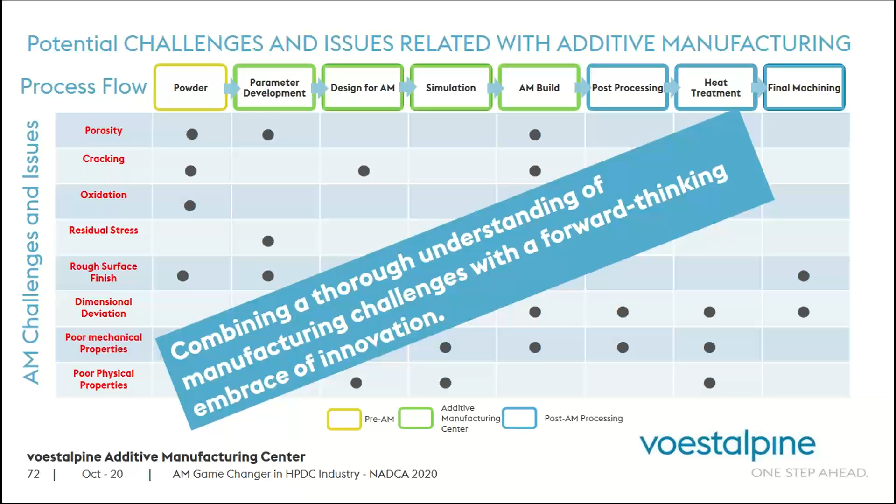However, with the Voestalpine group, we combine a thorough understanding of manufacturing challenges with forward thinking to embrace innovation. We can track back what went wrong because we take full accountability of every insert we deliver. This makes it easier for our customers - they can be guaranteed that we take full responsibility of the delivered insert.

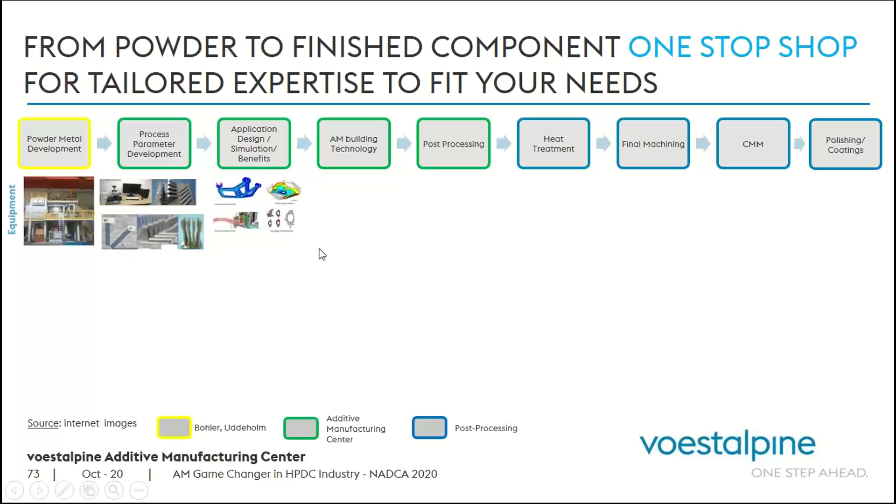So this slide summarizes exactly what I've been talking about: one-stop shop from powder metal development from our mills, process parameters, application design, building the parts, post-processing, heat treatment, final machining, CMM, polishing and coating.

So the main message here: we need to understand what the AM needs are, then we can formulate a complete solution. Whatever the solution is - it could be a special powder, a special design, or a special simulation to make sure we can iterate the design back and forth, or it could be a coating process that can just solve a problem.

And by being a one-stop shop, we can add value to our customers.

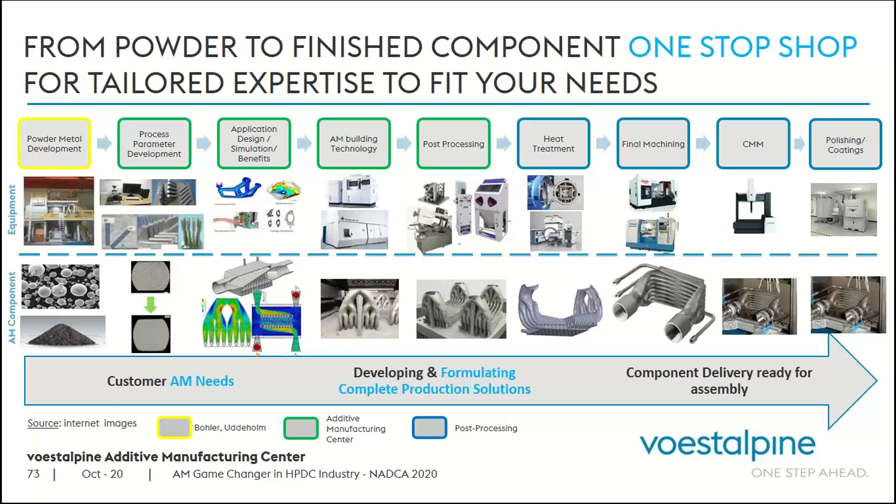Thank you, everyone. Thank you very much, Simon.